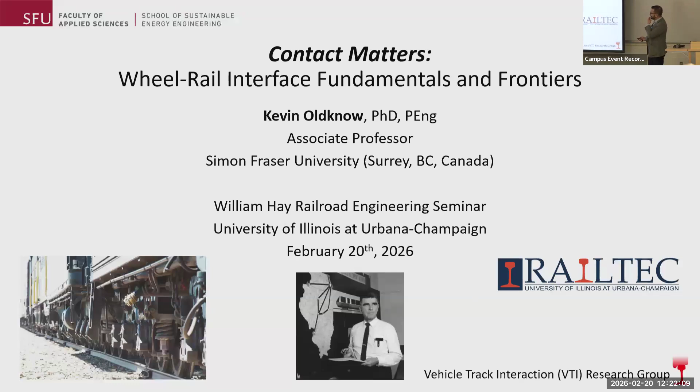As you've heard already, my name is Kevin Oldknow, and I'm an associate professor at Simon Fraser University. What I'm going to do in terms of flow is first start with a very brief introduction to SFU, just in case you're not immediately familiar.

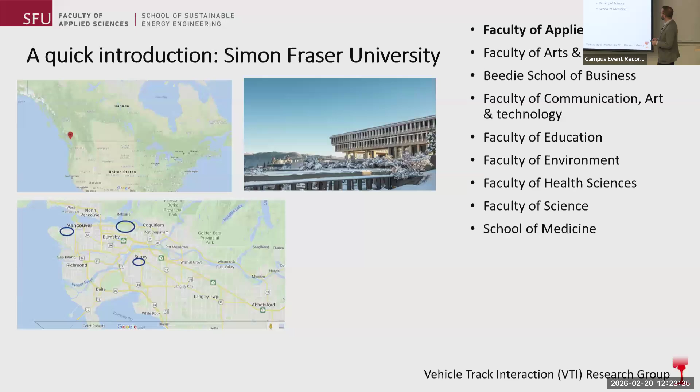At SFU, we now have 9 different faculties in the university, including the Faculty of Applied Sciences, which I'll expand upon in a minute. The rest you see on the list are long-standing faculties, with the exception of our newest addition, the School of Medicine, which is a very recent development for us.

The Faculty of Applied Sciences at Simon Fraser University breaks down into 4 schools or academic units, basically the same as academic departments. Our 4 schools are the School of Computing Science, the longest standing and largest; the School of Engineering Science, second longest standing and second largest; the School of Mechatronic Systems Engineering; and most recently the School of Sustainable Energy Engineering, launched in 2019. I was very lucky to be close to that project as it unfolded, and that's now my academic home, in the School of Sustainable Energy Engineering.

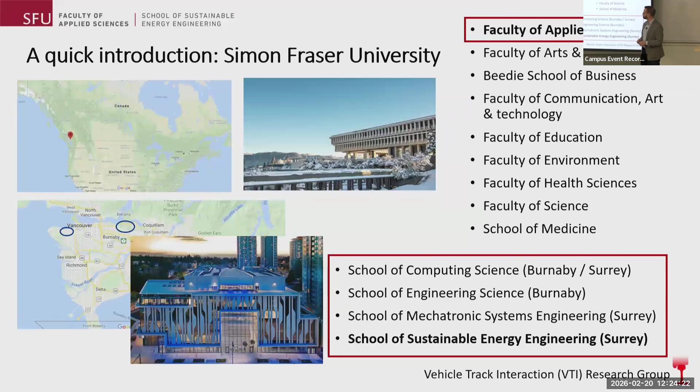Okay, with that out of the way, to give you a bit of an overview of the presentation, which parallels what you heard in the abstract, I'm going to spend the first portion of the time, probably about half the time, going through some wheel-rail contact fundamentals to lay the foundations and the framework for understanding the types of problems that we're looking at here.

And then in the second part, what I want to talk about is some important insights that those fundamentals allow us to gain, some important phenomena that they allow us to understand. Some of those are what I call low frequency in the vehicle track world, low frequency phenomena, and some of them are high frequency.

And then the last part of the talk will really be about open questions, and by that I mean open questions amongst the broader community, not only our research group at SFU, just more broadly in wheel-rail interaction, and then some of the projects that we are immediately and intimately involved in the group.

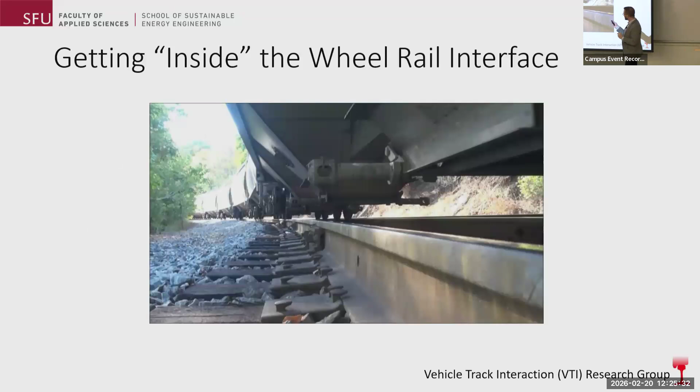Okay, so to get going, if we're going to start thinking about wheel-rail interface and wheel-rail contact fundamentals, the first thing we have to do is try and place ourselves right inside the wheel-rail contact area. And we might think that getting as close as this is good enough. I would argue it's not. I think we need to get closer. And so we probably need to start looking a little more closely like this. I would argue that's still not close enough.

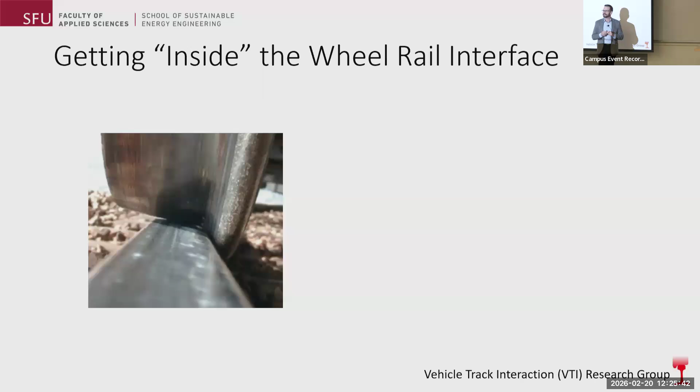And in fact, what we really need to do is try and put ourselves right inside that very, very small space. And one of the things that I've advocated many times when presenting is that when we're thinking about some of this stuff, it's sometimes a fun toy analogy to imagine ourselves in this space and imagine that the floor under our feet is the surface of the rail and that the ceiling above us is the surface of the wheel. And we are in this very dangerous seeming space with a lot that's going on.

But one of the things that's important is there is some physical separation between those two things, and we're going to find out that that is the reality as well, and that's an important part of the equation. So as we go through this, maybe from time to time, just imagine yourselves right inside that wheel-rail interface, right in the contact between the two surfaces, and imagine what's being experienced there.

Once we're inside there, what we need to think about, again, is this separation. There really is a separation between the two, and sitting inside that separation is something that we call the third body layer. I'll say some more about that a little later on. But this third body layer is built up of a number of constituents, some of them generated through wheel-rail interactions, some of them external contaminants. But it does the job of accommodating displacement between the two surfaces.

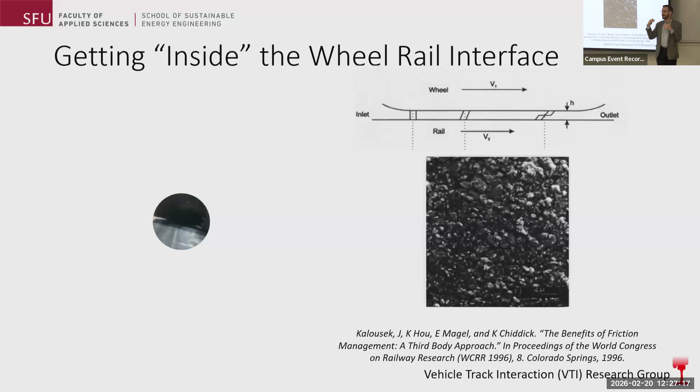So as we'll talk about, what is always going on during wheel-rail contact is those two surfaces are moving in some way relative to each other. There is almost always some relative motion between the surfaces of the wheel and the rail, and it's the job of the third body layer to accommodate that, to find some way to accommodate the relative motion.

So what I'd like to talk about now is what I think we can call the language of wheel-rail contact. And what I mean by that is, as Riley mentioned in the introduction, you've got these two very complicated systems, dynamic, nonlinear, sophisticated systems in the rolling stock and in the track. And they come together through the wheel-rail interface. And it's fun to think about in what ways can they talk to each other. So what are the means that they have to communicate through this interface?

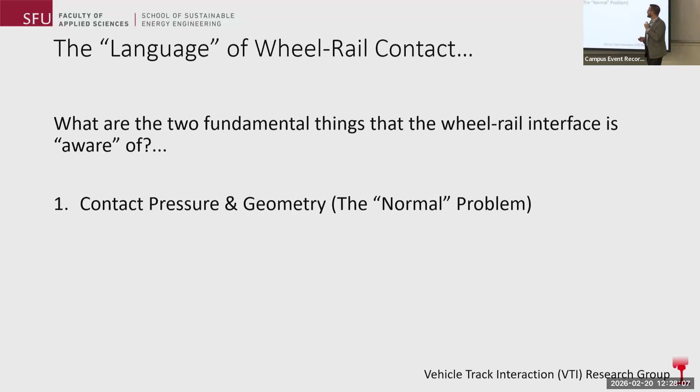And I'd argue that there's two. The first is contact pressure and geometry, and that's what we call the normal problem. So the first way that these two things interact and exchange physical information, if you like, is through contact pressure and geometry, and we call that the normal problem.

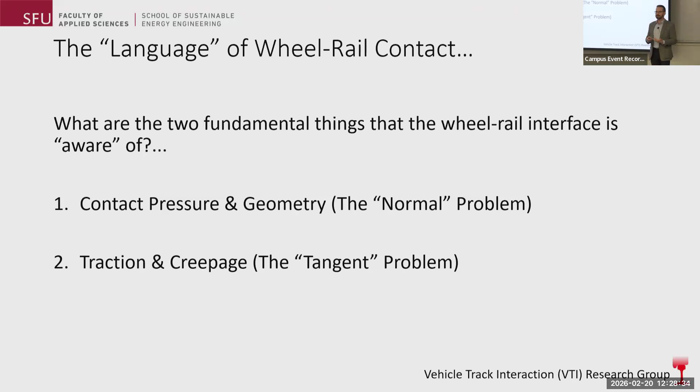The second element that they have in the language is traction and creepage, and what I mean by that is this notion of relative motion. So relative tangential motion between the two surfaces gives us traction and creepage, and this is what we tend to refer to as the tangent problem. So these two problems, or these two modes, give the opportunity for exchange between the wheel and the rail.

So we'll go through each of those one at a time. The first one, the first fundamental, is contact pressure and geometry. And so I want to ask just a couple of toy questions. The first one is, if we take a perfect circle, so perfect geometric circle, and we bring to that circle a perfect straight tangent line, what is the length of contact of a tangent line that is just immediately adjacent to a perfect circle?

The answer is 0, right? The length of contact between a tangent line and a perfect circle is 0. Okay, that didn't look much like a wheel and rail. This looks a little more like a wheel and a rail.

So now let's extend that and think about a perfect cylinder and a perfect plane. So if I bring a perfect cylinder, which is starting to look a little like a wheel, in contact with a perfect plane, now there's a line of contact. What's the area of contact between those two? It's also 0, right? The area of contact between a perfect cylinder and a perfect plane is 0.

Next question. If I tell you about force and I tell you about area, how do we calculate pressure? Force divided by area, right? If I want to know about pressure, I take force and I divide it by area.

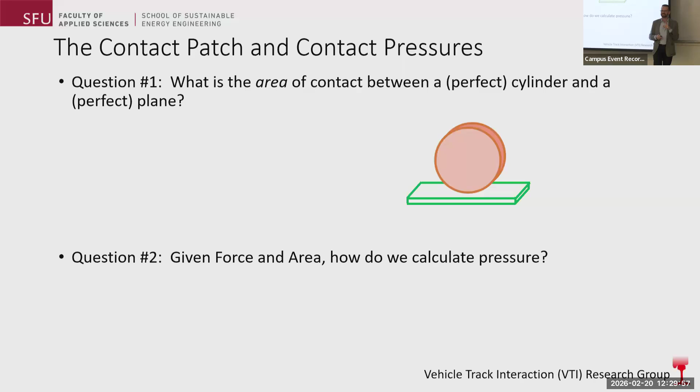So if I take a cylindrical body, which is a rough approximation to a wheel, and I bring it into contact with a planar body that's a rough approximation to a rail, and I apply a vertical force F, and I have 0 contact area, what's the contact pressure between the two things? It's infinite, right? You're dividing something by 0.

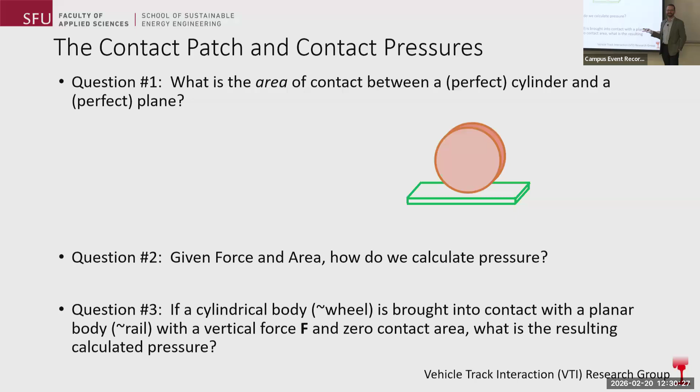And so that tells you that a whole lot of things are going to fail and fall apart quickly if that's what's going on. So clearly that is not what's going on, right? There's something else happening. And that's what brings us into this notion of the contact patch and the normal problem.

Hertzian contact is what we get when we bring two surfaces together with constant radii of curvature. So it could be a cylinder and a plane. It could be two cylinders, two spheres, just things that have constant radii of curvature. And under a specific set of conditions and assumptions, they give us this elliptical contact area.

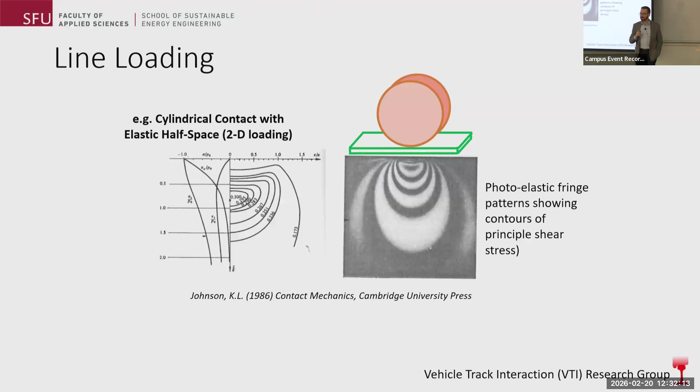So that can give us something like line loading. In this case, what we're looking at is contact along a straight line. And now instead of looking at those interference fringes, we're looking at photo-elastic fringes showing subsurface stresses. One of the first things that you can notice is that the point of maximum shear stress sitting under that contact is not right at the surface. It's a little bit below the surface. Typically, in a rail setting, that's a couple millimeters. That ends up becoming important for some phenomena.

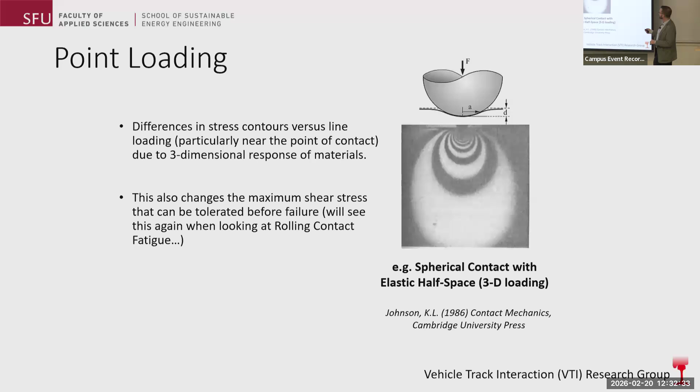We can also look at point loading, and this is what happens when we bring a sphere into contact instead of a cylinder. Each of these starts to reflect different types of wheel-rail contact. We see a similar response. It looks a little bit different, but we still see the case where we've got a point of maximum shear stress occurring at a depth below the surface.

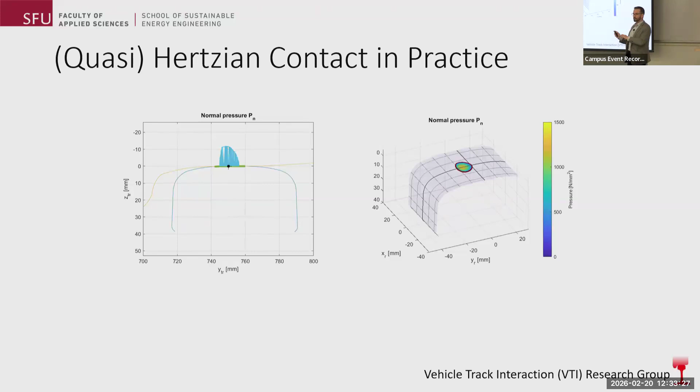What you'll notice is that in this case, we're talking about contact between the tread of the wheel and the top of the rail surface. In that case, the conditions are something like the Hertzian assumptions. So we end up with contact that looks something like a Hertzian contact ellipse. It's not too far off. And in these kinds of conditions, it's not unreasonable to approximate the system as Hertzian.

So we have to look at these things as being more complex and requiring a different kind of understanding and depth of analysis. So that was fundamental one, right? The normal problem where we're exchanging information through pressure and force. Fundamental two is this notion of traction and creepage. And so creepage occurs inside that contact area in three ways, in what are called longitudinal, lateral, and spin.

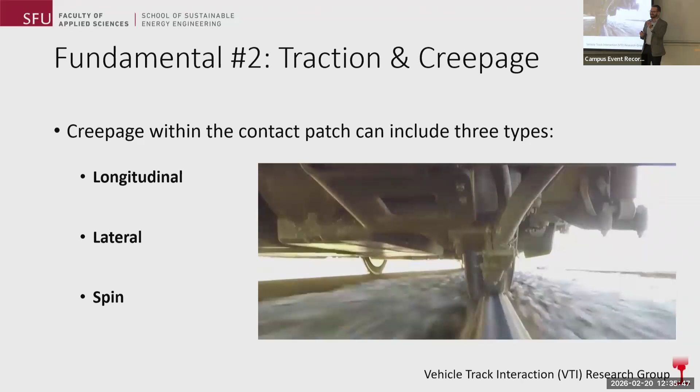Lateral creepage we can think of as the sideways motion of that wheel on the rail. And that's going to happen in curving, as we'll see in a minute, but it also happens fairly generally. That is not a static scenario. The wheel is moving laterally as it negotiates the track, and so that's giving us some degree of lateral creepage at the same time. And then spin, that we'll talk about a little more, is something literally like spinning a coin on the tabletop. It's a spin creep between the wheel and the rail.

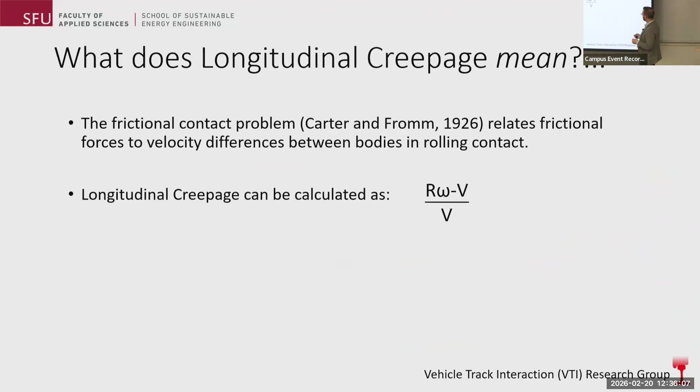Okay, so having looked at those illustratively, we can look a little more rigorously and say, all right, what does longitudinal creepage mean? The way it's defined, going back to Carter and Fromm, is this ratio. So R is the wheel radius, omega is the wheel's angular velocity, and V is the forward velocity. We subtract the forward velocity from the product of the radius and the angular velocity, and then we normalize by the forward velocity, and it gives us this number that we call longitudinal creepage.

So if our wheel is spinning faster than it would if it were just rolling along freely, we get positive longitudinal creepage. If the wheel is spinning slower than it would to just roll along freely, we'll get negative longitudinal creepage. And so that's essentially how both traction and braking are delivered through the interface, through positive or negative longitudinal creepage. So what does this look like inside the contact?

I'm going to run this animation twice. This is showing the contact solution under different states of longitudinal creepage. This is our contact area. We've got zero lateral creepage and zero spin creep, but we're going to advance the longitudinal creep, and we're going to see an increasing amount of creep, and we're also going to see an area of stick and slip that advances towards the front of the patch.

So I will run this again, but the way to imagine this is the forward direction of travel is to the right. We've got some relative motion between the wheel and the rail in the contact area. The more slip there is, the larger this area of slip is, and the smaller this area of stick is. So I'll run that once more, and the things to watch are these little arrows, which are telling us about the vectors of the traction force inside the contact area, and this boundary between the leading part of the contact that is in a stick state and the trailing edge that is starting to slip as that boundary moves forward.

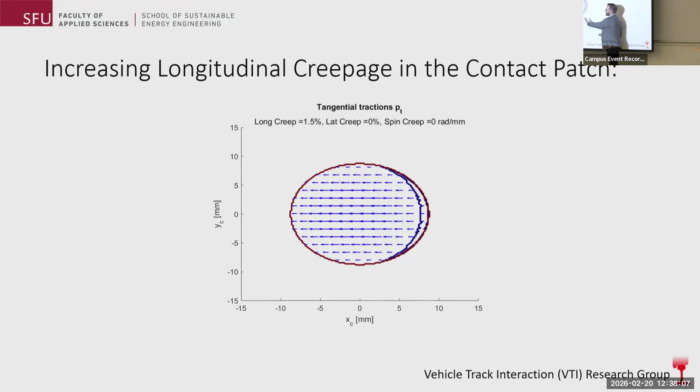So what happens is, as that area of slip increases, as we develop more and more longitudinal creepage, what we develop is more creep force or more friction force. And it ends up looking like this.

As we advance and gain more and more longitudinal creepage, so as that slip area moves towards the front of the contact patch, as we're slipping more relative to the rail, we get more and more friction force until eventually we saturate. And generally we can think of that saturation happening once the entire area is in slip. So once we've run out of stick area, the entire contact area is in slip, we're now saturated, and that roughly sits at the product of the normal force and the coefficient of friction.

Same thing is true in the reverse direction, which is how we get braking. So if we have negative longitudinal creepage, then we will develop a negative or a braking friction force until eventually we saturate that.

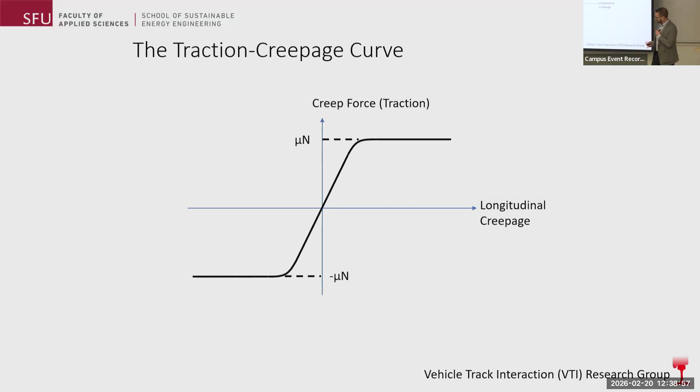What that's illustrating for us is an angle of attack that vehicle has taken up throughout the curve. So as that railway vehicle has negotiated the curve, it has taken up an angle of attack, and as a result of that angle of attack, the leading wheel set is seeing a lot of lateral creepage as it works its way through the curve. Okay, since it's pointing with an angle of attack, in order to keep moving in the intended direction, there must be some lateral creepage that's happening at the same time.

Spin creep, this one can be a little bit elusive, but it's not bad once you get your head around it. I mentioned it's kind of like spinning a coin on a tabletop. The way to picture spin creep is, let's imagine we are looking down on the wheel rail contact, and we are looking at this wheel that has a taper to it. So it has a conicity to it. And what we know is that as this moves forward, the wheel is going to rotate.

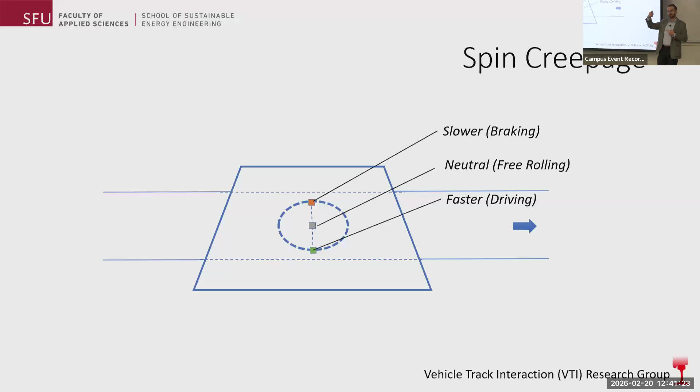And if our central point here is just in neutral free rolling, then that means our point on the smaller radius is actually in a state of braking, and that our point on the larger radius is in a state of driving. So if you look at that as a cross-section across the contact area, what you see is something that ends up looking like a spin. And so this is where we get spin creep from inside the wheel rail interface.

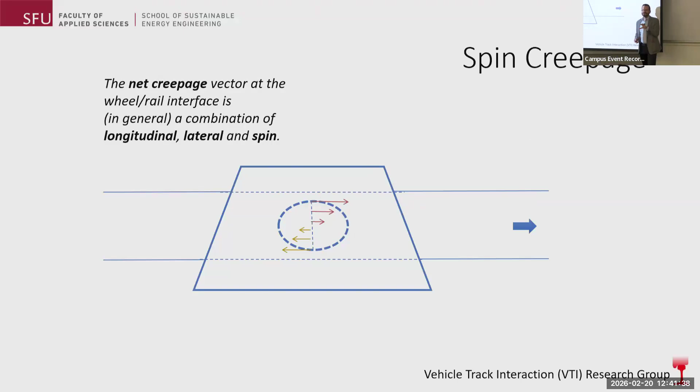The net creepage is some combination of all three, which gives us a fun question to think about. Imagine for a minute that we have saturated our longitudinal creep. Okay, so imagine we've got enough longitudinal creep, we've saturated creep in the wheel rail contact, and now our longitudinal creep force is approximately μN, right? Saturated friction. Imagine we have simultaneously saturated our lateral creep. And so our lateral creep force is also μN.

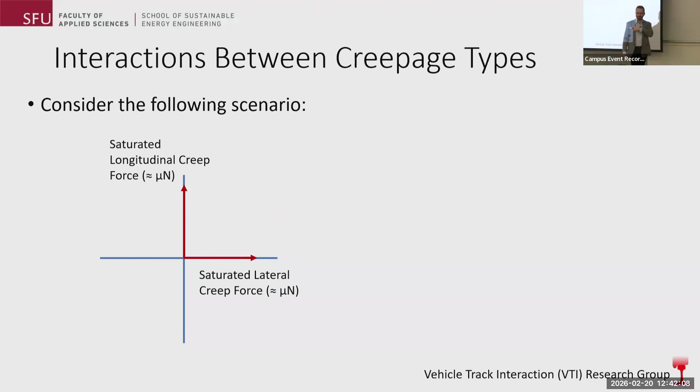That would suggest that the resultant creep force is the vector sum of those two. But the maximum friction force in any direction is μN. There is no way to have more friction force than μN in any direction. So that means you cannot simultaneously saturate longitudinal and lateral friction. And in fact, they must interact.

And so that's what we do see, is that if curve 1 here is what you get in terms of longitudinal force versus longitudinal creepage, as you introduce different types of creepage, lateral and spin, they interact with each other. And the total amount of longitudinal force that's available ends up being affected by the presence of the other types of creepage.

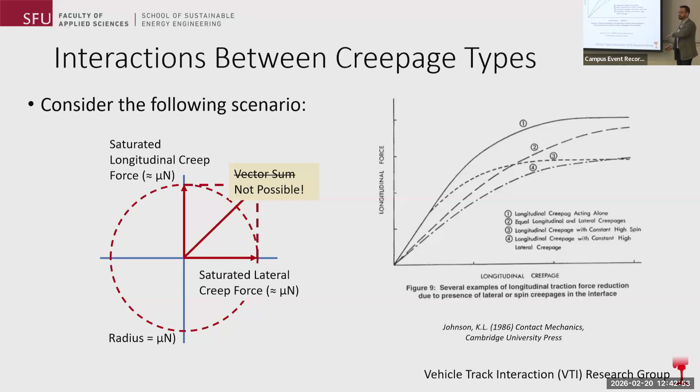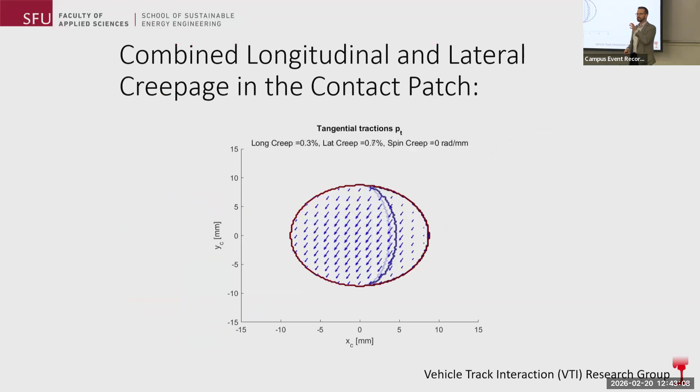So a couple more animations to look at really quickly. In this case, what we're doing is starting in a state of 0.3% longitudinal creep, and we're adding lateral creep to watch how the contact evolves. And so we can see those two modes of creep kind of sharing the interaction, and we can see how the overall contact condition changes.

So we can imagine all these things happening at the same time. There's some combination of longitudinal, lateral, and spin creep happening generally all the time, and that is determining what's happening with our friction forces coming out of that interface.

What I mentioned at the beginning of the session is that we also need to remember that although it's tempting to think about wheel rail contact as intimate steel-on-steel contact, it almost never is. There is almost always a third body layer separating those two faces, mainly made up of iron oxide wear debris, but often made up of other contaminants as well, either environmentally introduced or intentionally introduced.

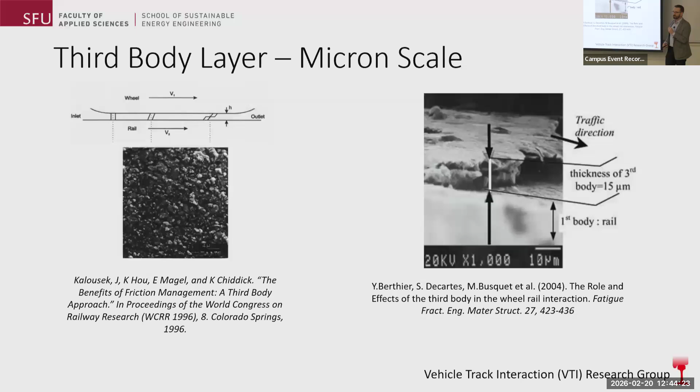And that third body layer, which is shown here in a micrograph just to prove to you I'm not making all this up, does the job of accommodating displacement. And the way that it reacts gives us the real behavior of this traction creepage curve. I've showed you the theoretical curve that says as you increase creep, you get increasing friction force until it saturates

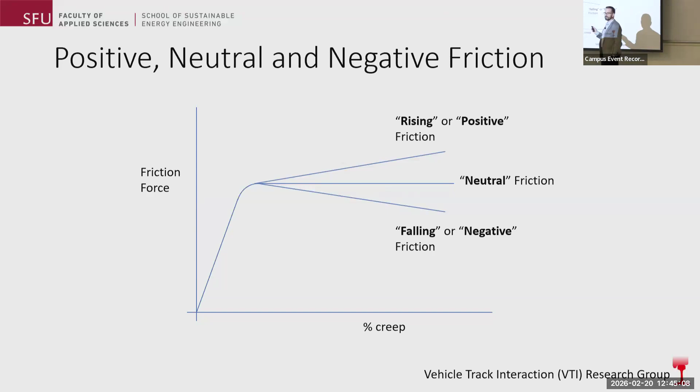and then stays neutral. In real systems, we can have neutral friction, or we can have falling or negative friction, where we actually see friction force roll off after the point of saturation. Or we can have rising or positive friction, where that friction force continues to increase past the point of saturation. And of the three, falling friction is the most commonly occurring in natural systems. So when you're out on track looking at a steel wheel on a steel rail, more commonly than not, the condition is one of falling friction between those two surfaces.

Okay, so those were the fundamentals. That was kind of the building block session that was meant to lay the groundwork so that we can think a little bit about some key phenomena and then look at the more recent research questions as well. Talk a little bit about low frequency examples, and what I mean by that in this case are curving forces and things like wear and rolling contact fatigue. These are not the only examples of things you can understand with wheel-rail fundamentals. They're just a couple of illustrative ones. And then high frequency will be corrugations and curving noise.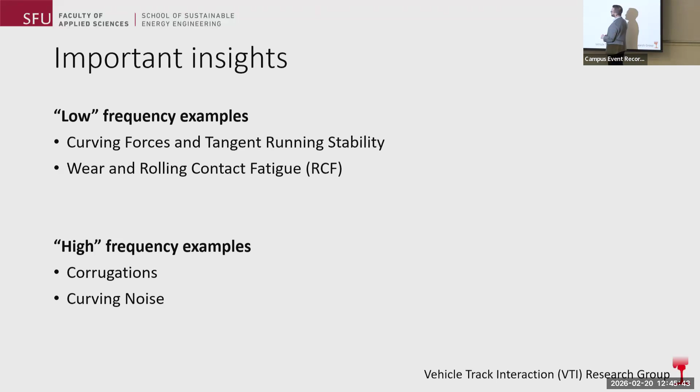Okay, so let's talk about steering forces, and then we can talk about curving forces, and we can talk about stability. Let's imagine now that instead of just a wheel and a rail, what we have is a wheel set. And that wheel set is arranged so that it is perfectly centered. We have the conicity of the wheels, and because it is perfectly centered, each wheel is running on the same rolling radius. Now what we do is give that a nudge. We move it to the right. As soon as we've done that, what we've done is displaced the wheel set so that the right wheel is now running on a bigger rolling radius, and the left wheel is now running on a smaller rolling radius.

Based on what we've already seen, we can then say, if both of these things are running on the same rolling radius and just freely rolling along, then this is where we sit on the traction creepage curve. There is no longitudinal creepage, and so there is no friction force. We're just freely rolling along.

As soon as I have nudged this wheel set to the right, and I'm now running on a larger radius on the right wheel and a smaller radius on the left wheel, my larger radius is going to push me into a state of positive longitudinal creepage. And I'm going to see a positive creep force. My left wheel is going to push me into a state of negative longitudinal creepage and give me a negative friction force. The way they end up acting on the vehicle looks like this.

My positive creep force points forward. My negative creep force is a braking force pointing backwards, and that's going to steer that wheel set back towards the center of the track.

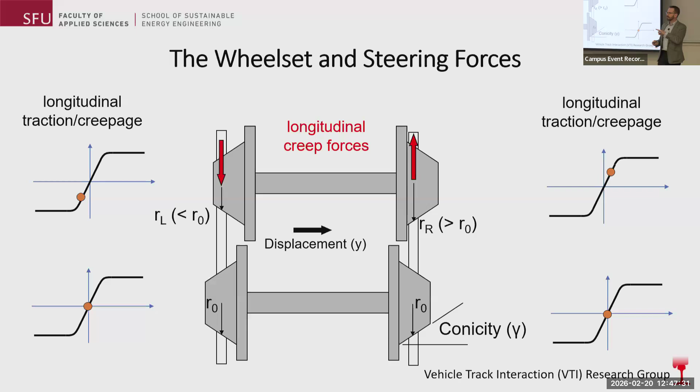So that puts together this notion of creepage, of traction forces, of rolling radius difference, and how that generates steering forces. The rate at which those forces develop with lateral displacement depends on the rolling radius difference, and you see that expressed in these plots, where this is a plot of the difference between the radius of the right wheel and the radius of the left wheel at the points of contact.

As it is displaced: so as I displace the wheel set to the right, my right wheel is getting bigger, my left wheel is getting smaller, and so the difference between those two is positive and growing. If I displace it to the left, my left wheel is getting bigger, my right wheel is getting smaller, and the difference is negative and falling.

And the slope of that is telling me how quickly that change in radius is occurring, or how aggressively the wheel set is going to steer. The steeper this slope is, the faster the effective difference in radii is changing, and the higher the steering forces are going to be.

Anyone want to say what's going on with these approximate vertical spikes? What's happening there? Wheel flange, exactly right. So what happens is as you engage the wheel flange, suddenly that wheel is getting much bigger very quickly. And so that point where the rolling radius difference plot takes off is the point where your wheel flange is now engaging. One of those wheels is starting to get very, very big, very, very fast.

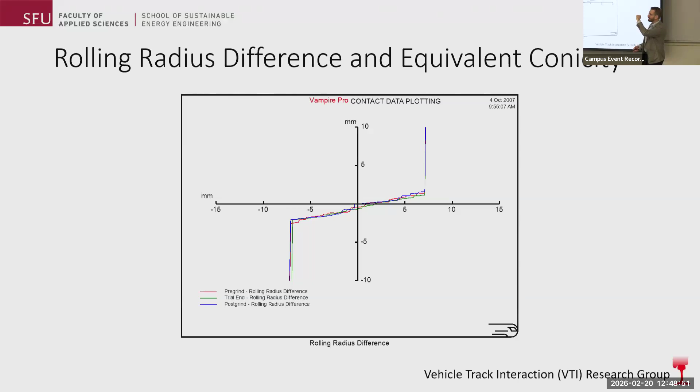Okay, so let's now take all this and put it into the case of curving forces. We're going to put ourselves in a sharp curve, which means we have run out of rolling radius difference and we have engaged the flange. Let's think about what's happening with creepage.

At the trailing axle on the low rail, we've got the case where the wheel set is more or less centered and radially aligned. In that case, we have a state where the creepage is primarily longitudinal creepage. That radius is bigger than it would like to be, and so it's in a state of driving positive longitudinal creep.

Trailing axle at the high rail, similarly, that wheel is smaller in radius than it would like to be. As a result, it is in a state of negative creepage and generating a braking force.

Leading axle at the low rail is primarily in a lateral creep because of that angle of attack. And because of that lateral creep, we get a lateral creep force.

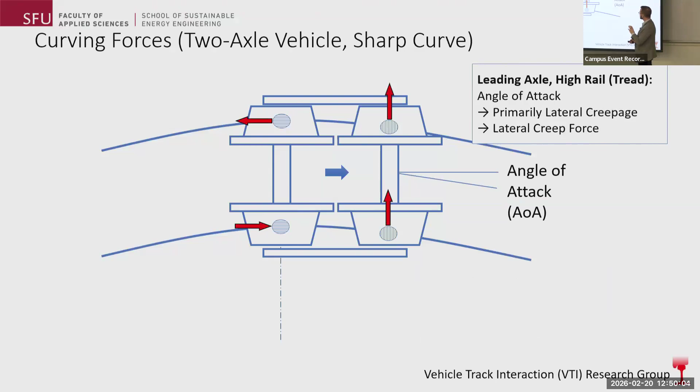And then at the high rail tread, we get a similar effect. Because of that angle of attack, the high rail tread is experiencing mainly lateral creep, which leads to a lateral creep force. The high rail flange is a different matter in the story.

So at the high rail flange, as we had correctly answered, we have a sudden rapid increase in radius, and so a very large rolling radius difference and a very large positive longitudinal creep, which leads to a creep force.

Now, if I look at each of these, these are the forces acting on the vehicle. And think about what is each of these forces doing? Is it trying to help the vehicle stay in the curve, or trying to steer the vehicle out of the curve? And the answer is every one of these forces, except for the force at this flange, is trying to actively steer the vehicle out of the curve.

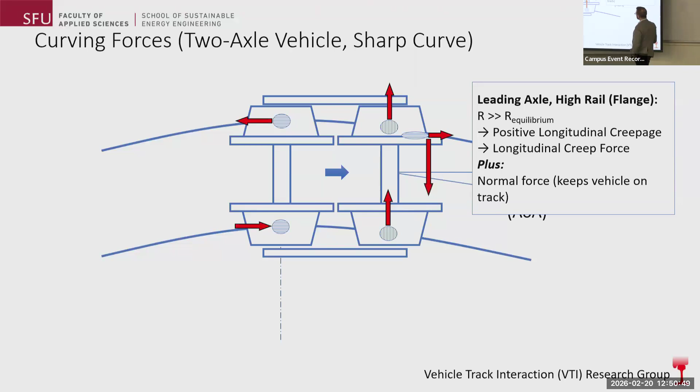Okay, so what's keeping us in the curve is a reaction at the flange. And our track ends up feeling this: our track ends up feeling these track spreading forces, which are the net sum at each rail, and also these longitudinal creep forces at the trailing axle.

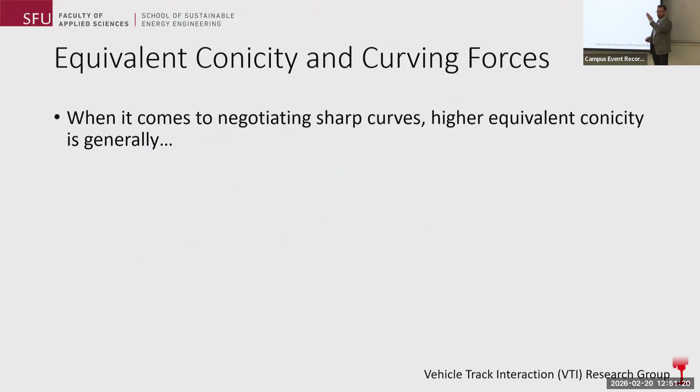So having looked at all of that and thought about it, when we're talking about negotiating sharp curves, higher equivalent conicity, meaning a steeper slope on the rolling radius difference graph, is generally good. It generally makes us happy. It means we're going to steer better around shallower curves, and we're going to get through sharper curves before we engage the flange.

Okay, now what about tangent running and stability?

If we look at this wheel set again in tangent track and give it a nudge, we'll find that with that initial nudge we get longitudinal steering forces in the way we've talked about. As a result, that wheel set will approach the center line of the track at an angle and with a given velocity.

If the overall velocity of the system is relatively low, it will result in a set of oscillations that eventually die out. But there's a speed above which those oscillations will not die out, and we end up with a bifurcation that leads us to the hunting phenomenon.

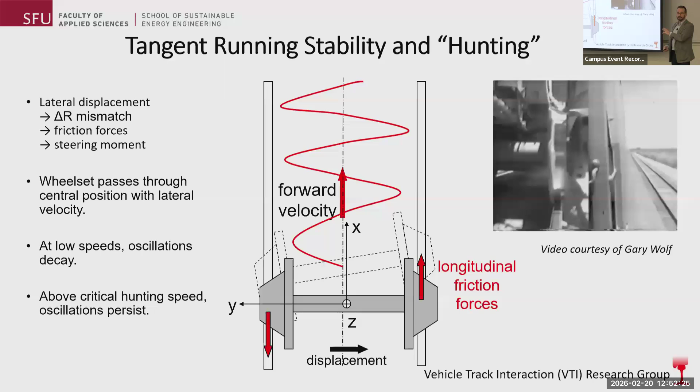We see this in the real world. Gary Wolf very kindly provided this video to include. It's a fairly violent interaction between the wheel set and the track, and that's due to the onset of this hunting instability coming from our creep forces.

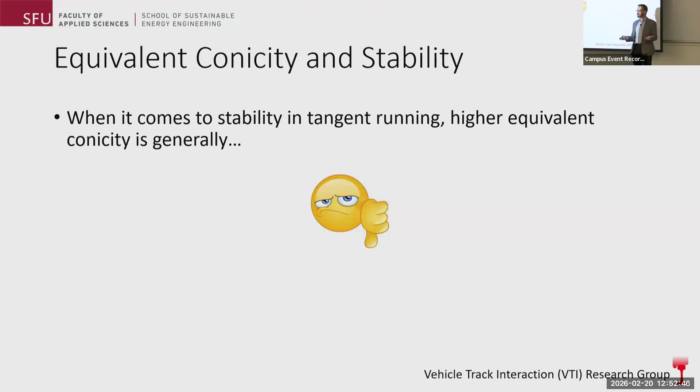So when it comes to stability in tangent running, higher equivalent conicity is generally bad. It's generally going to bring the onset of instability at a lower speed. It's a classic engineering problem: what is the right level of equivalent conicity to have? It really depends on your system. It's a classic trade-off.

Okay, what about friction? What about wheel rail friction? We know there are cases in which the gauge face of the rail is intentionally lubricated and the top of the rail is intentionally managed at a given friction level. What does that do for our steering forces?

Lubrication, if we picture it, has the effect of reducing the available friction on that gauge face. And we know that this interaction was the one and only place where we were generating a positive steering force. So gauge face lubrication, a little bit counterintuitively, is actually going to rob us of steering and make our lateral forces go up.

Gauge face lubrication brings wear down and brings energy down, but it makes lateral forces go up because it's robbing us of that steering force.

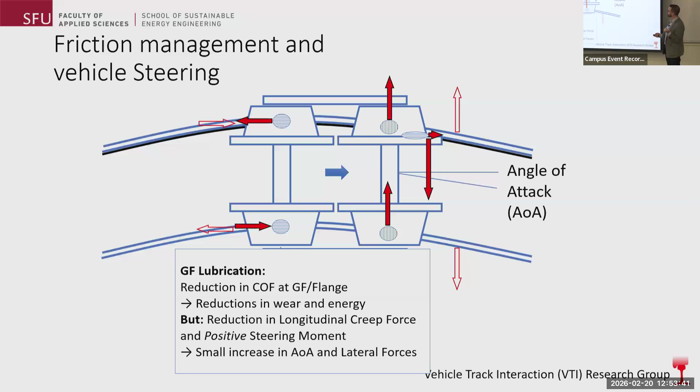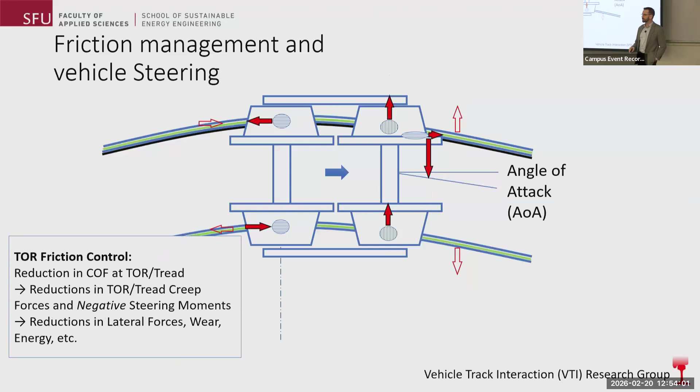The introduction of top-of-rail friction control then affects each of the other forces in the system, and every one of those was a counter-steering or anti-steering force. So introducing a change in top-of-rail friction typically reduces all of those other forces and therefore brings the curving forces down.

That might make us worry a bit about derailment coefficient, but making the coefficient of friction on the gauge face lower also makes it harder to climb. So even though we're increasing lateral curving forces, which might seem to increase the risk of rail climb, we're also making it harder to climb that rail. Overall, the risk of derailment tends to reduce.

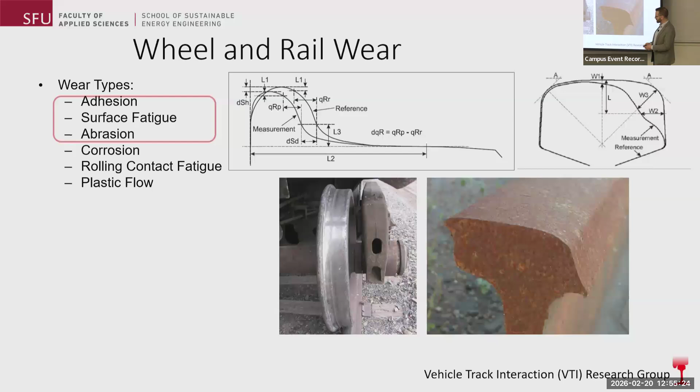Another low-frequency, long time period phenomenon is rail and wheel wear. We're used to seeing images showing the worn states of each, and diagrams showing how we tend to measure these things. Conveniently, the mechanisms that dominate wheel and rail wear tend to be well suited to modeling through what's called an Archard wear law, which gives us important insights into the impacts of various factors.

This law tells us that the volume of worn material is proportional to the normal load between the two bodies and the sliding distance between them, and inversely proportional to the hardness, and also proportional to this constant C. That constant is in turn proportional to the coefficient of friction. We can arrange all of this to show that wear volume is proportional to sliding energy, which becomes important later.

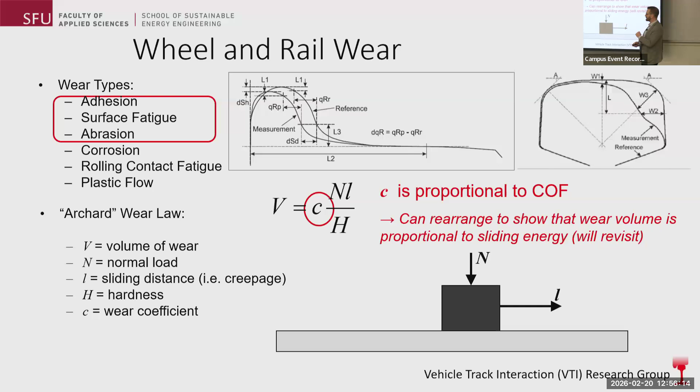Shakedown and rolling contact fatigue. This is a chronic issue in many rail systems, where we have the formation of rolling contact fatigue cracks, like we can see here. They can be gauge corner cracking, head checks, top of rail fatigue, and so on. In some cases, this can develop into something that is not pretty to look at, but not inherently dangerous, when we get these kinds of shelling out events. In others, though, we can end up with really severe risk associated with transverse defects and rail breaks.

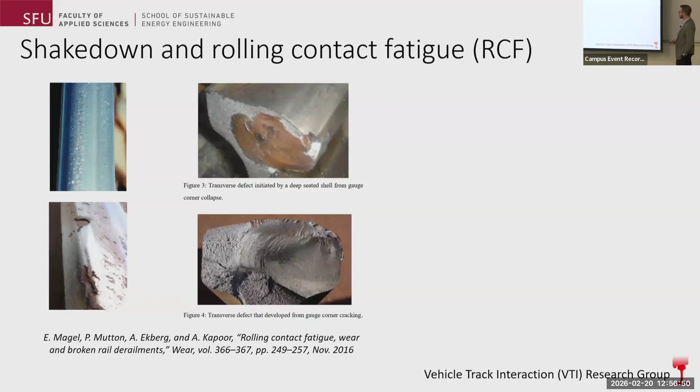What's interesting here is it connects to the insight of seeing that point of maximum shear stress sitting below the surface of the rail. When we apply pressure between a wheel and a rail, we initially get a point of maximum shear stress sitting directly underneath. As we increase the traction coefficient, that point starts to move closer to the surface and grow in intensity, which is why at large traction coefficients, it takes smaller peak pressures to enter a state of ratcheting.

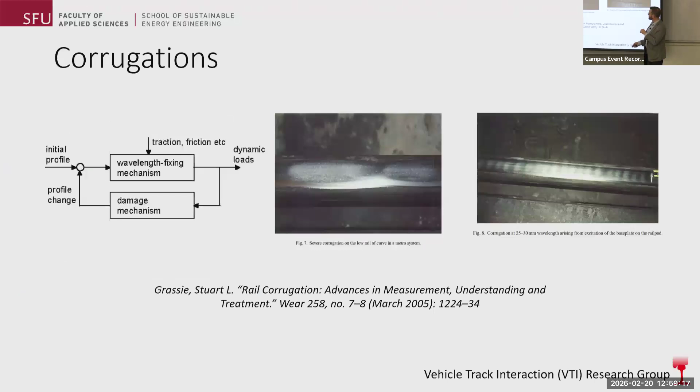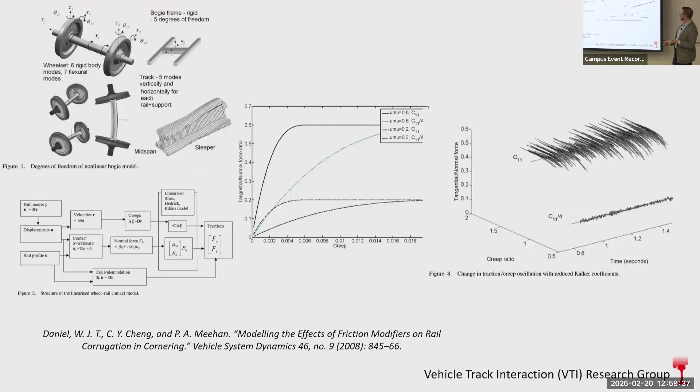Corrugation work has continued well beyond the initial work cited here, getting more complex in looking at multiple modes of vibration, both the vehicle and the track, and comparing the effects of friction states, both high and low, understanding how they affect the T over N forces and amounts of creep. What we're looking at here is a case where a higher state of friction gives us higher T over N forces and higher amounts of creep. A lower state of friction gives us lower of each, which in turn tends to suppress the onset of corrugations.

Now to the one and only audio clip in the entire presentation. Another thing that wheel-rail fundamentals have let us understand is curving noise. Curving noise can come about in a number of different ways. One of the interesting ones is curve squeal, and I'm going to play a clip now.

We'll see what the volume is like.

Curve squeal is that recognizable single tone noise mechanism. It's not the grinding or hissing noise we get with flanging. It's a single tone, and that tone comes from excitation of the wheel web in a way that it ends up acting like a loudspeaker. We have a frictional condition at the wheel-rail interface where, through this falling friction mechanism, we get an instability mechanism, and that instability can allow excitation of the wheel web in a specific mode that results in this squeal noise.

That work has continued, and what we see is that manipulating the friction between those two bodies is an effective way to suppress the noise mechanisms, either through reducing friction or through changing the post-saturation slope.

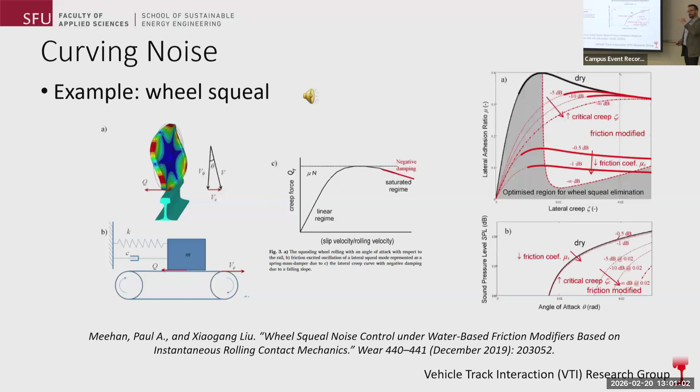I'm going to talk very briefly about a couple of open questions in the community, and these are in the broader research community, not specific to our group.

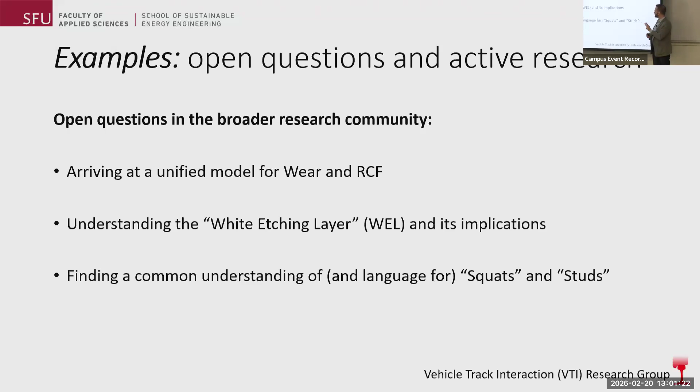First is arriving at a unified model of wear and RCF. Second is understanding the white etching layer. And the third is finding a common understanding and language for squats and studs.

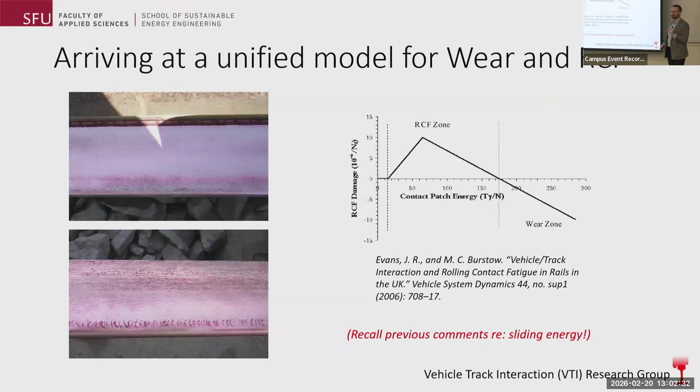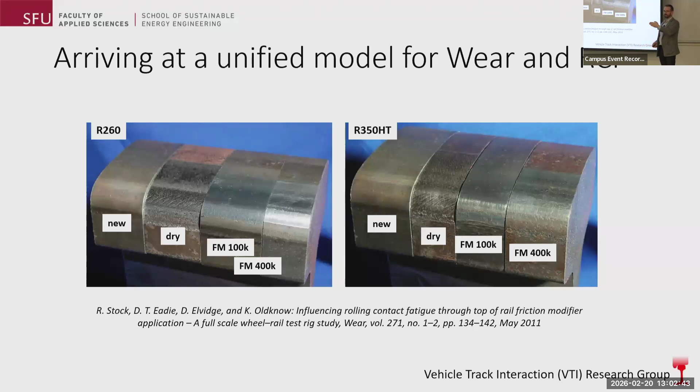This has ended up being useful as a practical tool in a number of different places. It doesn't end up explaining everything, and so there's still work to do here. I think this has been a fundamentally important insight, but it's not the end of the story. And we do see cases where both RCF and wear move together. So a reduction in one is accompanied by a reduction in the other. That doesn't perfectly align, and it tells us there's a clue in there that there's more to understand.

The white etching layer is something that's become a particular point of focus amongst the broader community quite recently, over the last number of years. This has to do with what we see when we etch rail and wheel steels to get an insight into the grain structure. And what we see is that there are often areas that simply do not etch, and then they show up in the micrograph as a white area or a white etching layer.

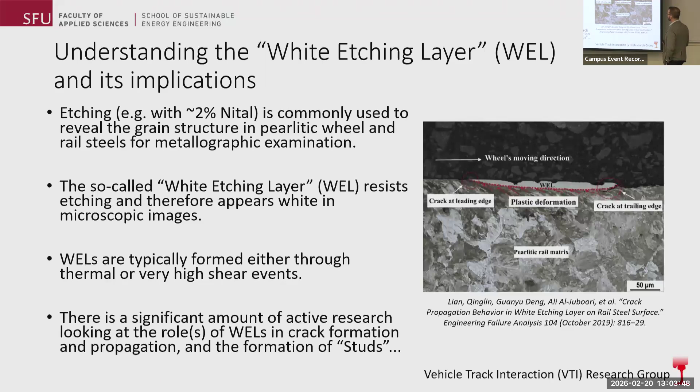And typically they are not etching because they've either undergone a high thermal intensity process, so there's been a wheel flat or a skid or something that's introduced a high temperature, high thermal input, or they've gone through a very high shear process. And there's a lot of open questions and open research in terms of what the interactions are between these white etching layers that appear and crack initiation sites. And that particularly ties to our understanding of something called studs, which is what I'll talk about now.

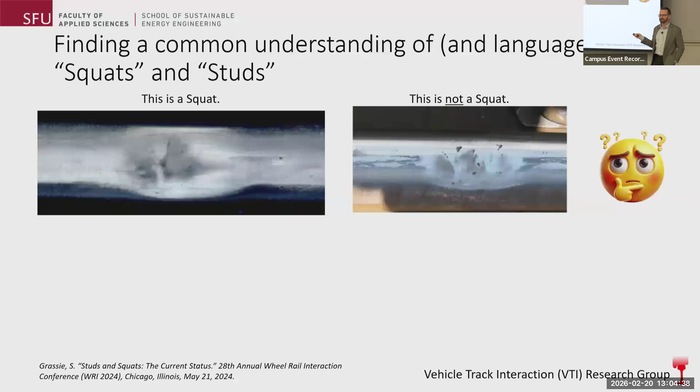Well understood. This is not a squat. And this has led to a lot of confusion in the industry. Okay, so this is a squat. This is not a squat. It is very, very difficult to tell the difference looking at the surface. To understand the difference, we need to look beneath the surface.

And what we see is that a squat is formed as a rolling contact fatigue ratcheting-based mechanism that can lead, eventually, to a transverse defect and a dangerous rail break situation. Whereas a stud tends to involve cracks that kind of meander along near the surface, but don't really present real imminent danger. These form very slowly under particular conditions. These form very quickly. So we're talking 100 MGT, let's say, versus 15 MGT.

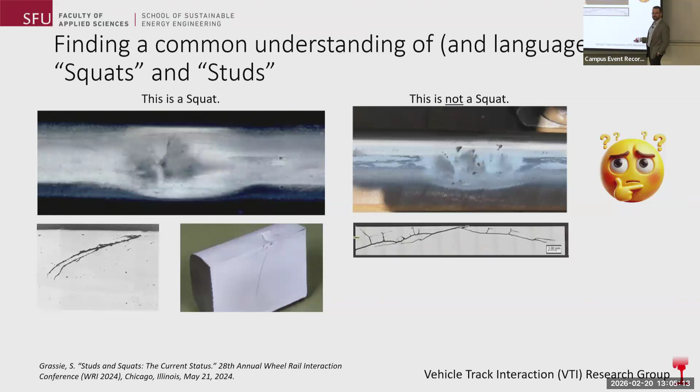And where we can see the difference really is looking at the grain structure. What we can see is a squat has experienced substantial ratcheting and plastic flow, whereas a stud, for reasons that are still being understood, just seems to wander around and follow the grain boundary. We have good insights, but it's not an answered question, at least not a completely answered question.

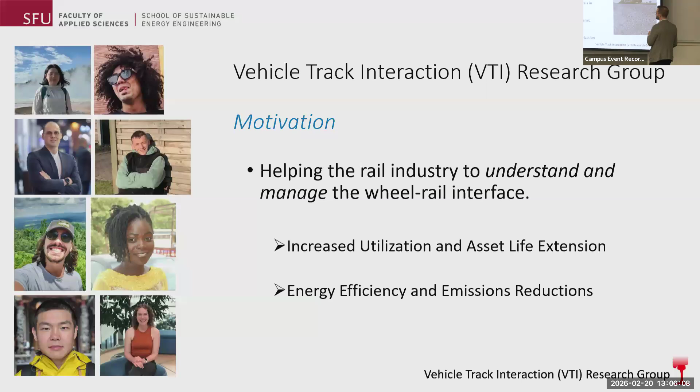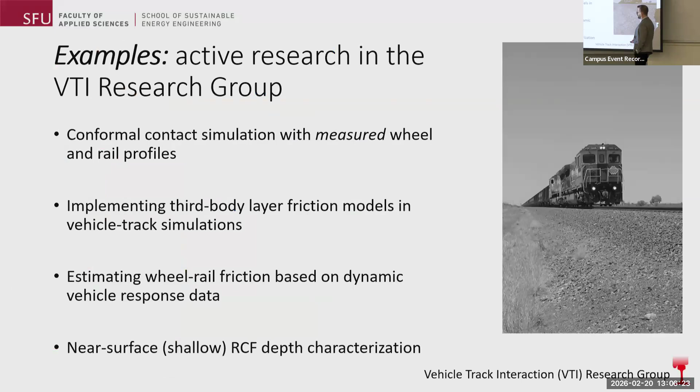We see that as leading to increased utilization and asset life extension, and in turn that leading to improvements in energy efficiency and emissions, as well as embodied carbon footprint. The 4 projects I'll touch on very quickly are conformal contact simulation with measured profiles, implementing third-body layer friction models, estimating wheel-rail friction based on dynamic vehicle response data, and near-surface RCF depth characterization.

So we've looked at these contact simulations, and what becomes tricky is that when we run contact simulations with perfect as-designed profiles, they give us meaningful results, and that's great. When we run these contact simulations using measured profiles, those profiles contain some combination of what is real surface roughness and some artificial measurement noise, and they occur at overlapping wavelengths that make them very difficult to untangle.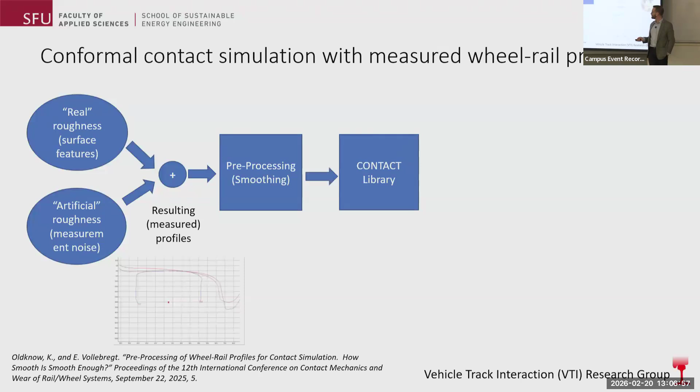So when we apply some pre-processing and smoothing and run that through our contact library, we can get results ranging from this at very low amounts of pre-processing to this at very high amounts of pre-processing. This seems artificially spiky. The peak pressures are unreasonably high. This seems satisfyingly smooth, and the peak pressures are much lower. But knowing what the truth is, is nearly impossible. So what we need to do is come up with some practical way to decide how much filtering to apply.

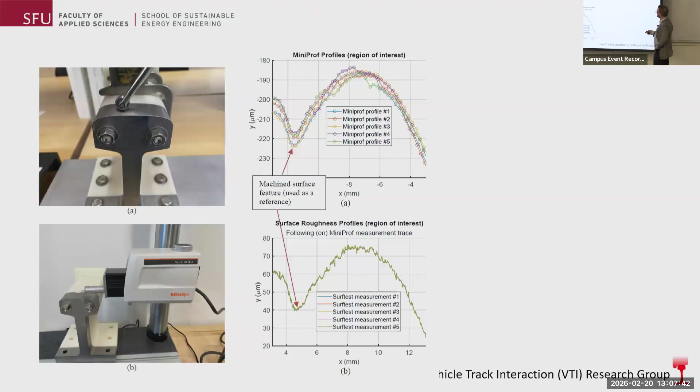So as a fairly simple experiment, what we did was run a surface roughness tester over a limited range of profile, and then also ran one of our typical measurement instruments and looked at the differences in the repeatability of those profiles as well as the roughness content. So here we're looking at the wavelengths over which roughness is occurring and the contributions to the overall shape, as well as this presence of noise that we need to try to eliminate.

So to do that, I've been collaborating with Edwin Vollebregt over at VTech CMCC in the Netherlands. And Edwin's put together a really nicely effective splining approach that lets us filter these profiles at given cutoff wavelengths. And we've been doing work to understand what is the wavelength at which we maximize the suppression of noise without starting to influence the overall shape that we're trying to understand. So this has been an important bit of work in trying to get these contact pressures right.

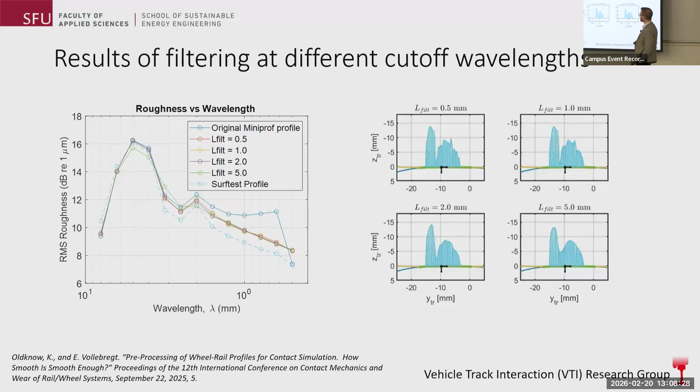What that means is that at low curvatures, in shallow curves where we're at low creepages, our simulations are getting it wrong. And in those low curvature states, we can see a lot of important phenomena emerging. So there's motivation to get this model right. What you're looking at here is a third body elastoplastic layer that goes along with this notion of the third body layer. This was developed by Kalousek and others a number of years ago.

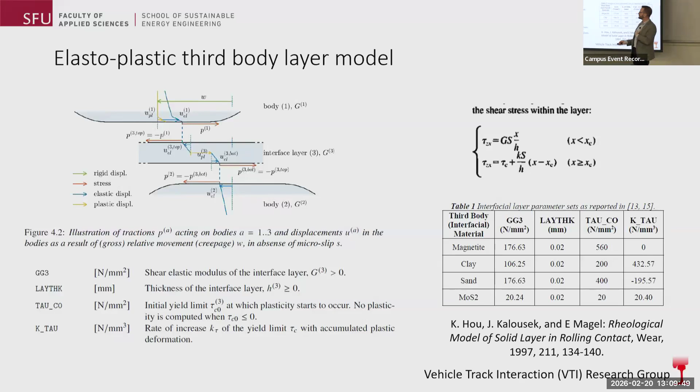And what it does is explain phenomena in terms of a third body layer between the 2 surfaces that is initially elastic, but eventually fails and becomes plastic. And once that occurs, it can either continue hardening or begin softening. What that gives us the possibility to do is then use the different parameters of the model like paintbrushes and explore the space of possible traction creepage curves.

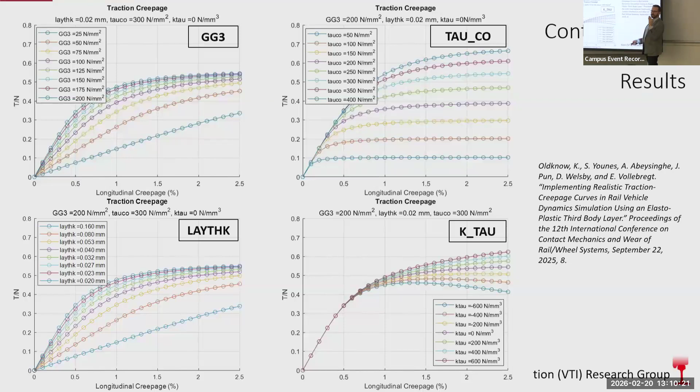So here we are affecting the shear stiffness of the layer, the thickness of the layer, the shear yield strength of the layer, how quickly does it break, and what it does after yielding. Does it continue to get stiffer or does it start to soften? So by putting these four kind of paintbrushes together, we can create traction creepage curves that behave like various third body layer model situations. So we've done that and run those through vehicle track simulations, and what we do see is significant differences in our curving behavior.

Estimating wheel-rail friction based on dynamic vehicle response data. The issue here is that friction is managed all over many networks. What is still maddeningly difficult is trying to verify, particularly, that the top of rail friction control systems are working everywhere. So if you've got top of rail friction control systems spaced a couple miles apart, how do you know what the friction coefficient is looking like over that wide expanse? And it's very, very difficult to do that.

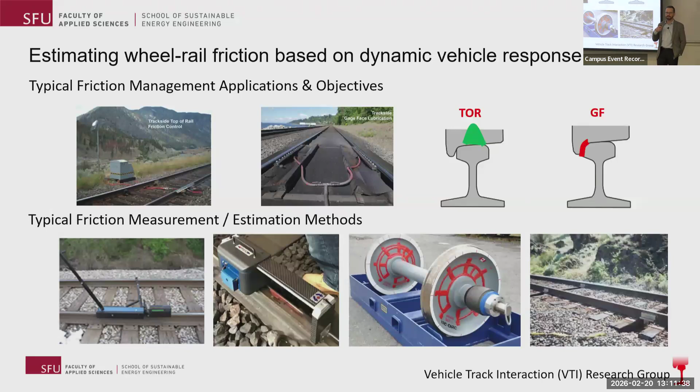There's a number of traditional measurement methods, including tribometers, instrumented wheel sets, lateral force measurement sites. They all have a range of limitations. What we're aiming to do is see if we can make use of dynamic vehicle response data coming from vehicles that are already running around in revenue service to infer friction states.

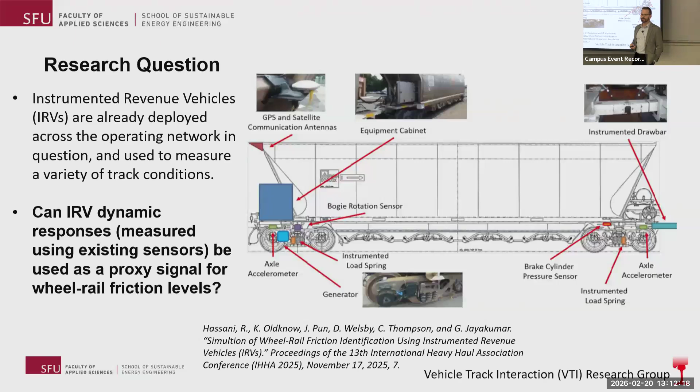From earlier in the talk, what we know is that friction affects vehicle dynamics. Right? We know if we change the friction at the wheel-rail interface, the dynamic vehicle response will change. So can we run that in reverse? Can we look at the dynamic vehicle response and infer the underlying friction state? The strength of the approach is that these vehicles, measuring a number of different dynamic signals, are already running around in revenue service in Australia. And so we're trying to understand if we can use that data in the way we want to.

To do that, we combine both a simulation and a field measurement framework. In the simulation framework, we can specify the friction level. We can set it. We can watch what happens with the dynamic vehicle response data. We can analyze what comes out, look for features that make sense, and think about how we interpret those. In the field measurement framework, we cannot specify the friction. Right? We cannot go out into the real world and dictate what the friction is between the wheel and rail.

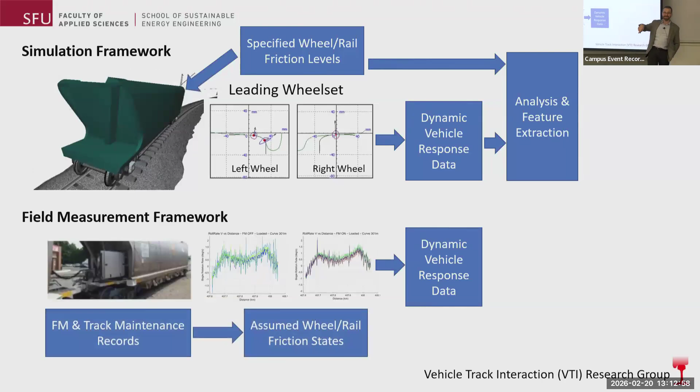We just can't. What we can do is take a look at the maintenance records for the friction management systems and understand when they were off and when they were on, when they were maintained and when they were put back into service. And from that, we can infer, if you've shut off all your friction management systems, you're probably in a drier state. If you've just serviced them and brought them back in, then you're probably in a well-managed state. And so we can look at it as a classification problem. Compare differences in the dynamic signals from an FM off versus an FM on state. Again, look for features and bring these two together into a machine learning-based friction classification model.

We've published some initial results of this recently at IHHA and are looking forward to some more substantial publication a little later this year. The last piece of the puzzle, and I know I'm a minute or two over, this is the very end, is near-surface rolling contact fatigue depth characterization. The challenge here is that we want to manage the development of rolling contact fatigue by removing it. We remove it by grinding, sometimes milling or other processes depending on the depth. But what we want to do is catch it when it's shallow. And we want to remove the right amount of metal.

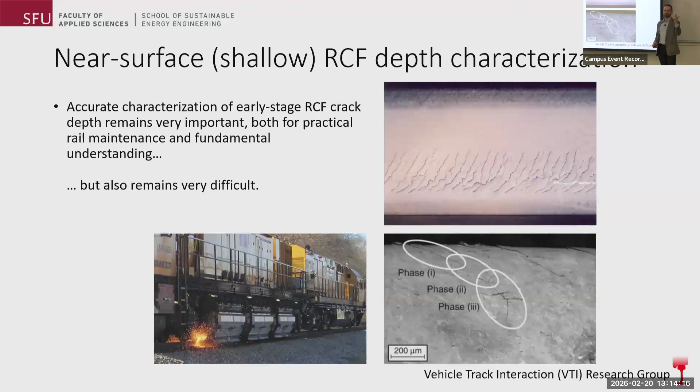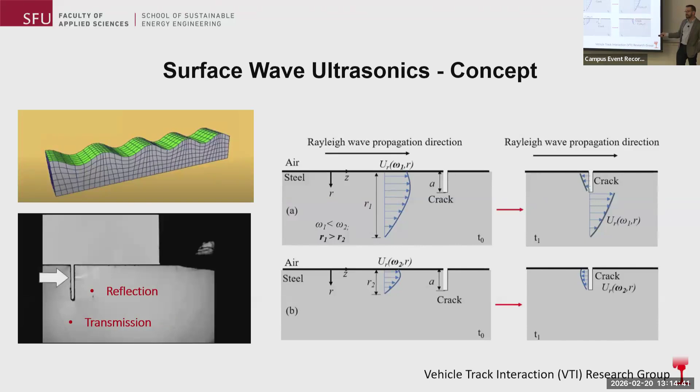What is difficult is measuring the depth of shallow rolling contact fatigue. So knowing, should I grind off 0.5 millimeter, 1/4 millimeter, what's the right amount to remove, is very hard to measure. And it has economic consequence. So what we're investigating here is the use of surface wave ultrasonics or Rayleigh wave ultrasonics, which we're able to send along the surface of the rail and allow them to interfere with cracks. The principle is shown on the bottom left, and the idea is that waves of different frequencies travel at different depths and will interact differently with different crack types and depths.

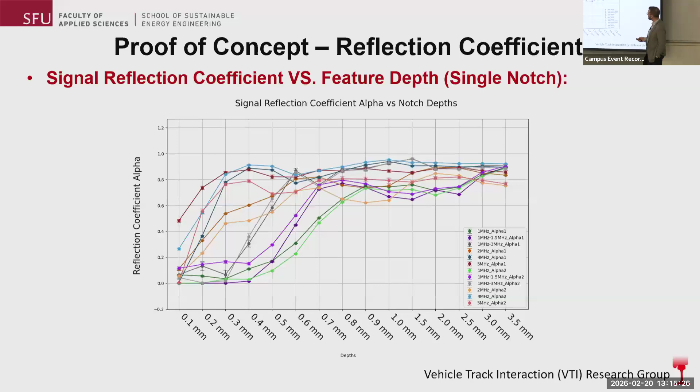So what we're doing, this is in collaboration with a peak-to-peak measurement that came out of the University of Sheffield, is looking at measuring simultaneously across multiple frequencies in multiple measurement modes to see if we can characterize these shallow features. And this is what we're starting to see. Each one of these lines is showing a different measurement mode at a different frequency, and we can map that to the depth of what is currently artificial damage, just machine notches, and see that by synthesizing all of these signals, we have a good shot of understanding what the depth of a given feature is. So in this case, we've published based on proof of concept and are now moving on to physical rail testing.

Wrapping things up, conclusions are, developments in fundamental understanding of wheel-rail interaction give us, I think, important insights into important phenomena. There are several fundamental research questions that are open, and they give us fertile ground for interesting work. And I'd say we still have much of that work to do.